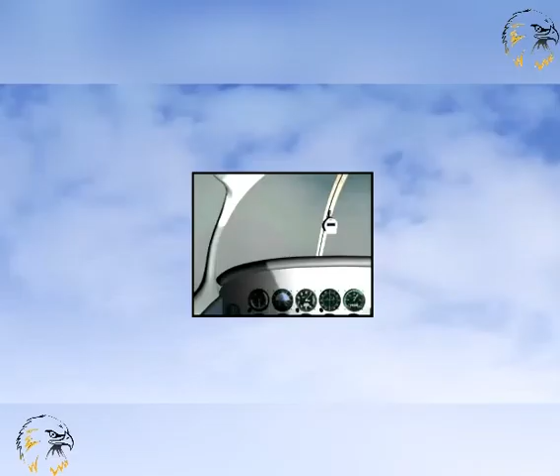In this lesson, you will learn about the instrument flight rules.

Expressed simply, the instrument flight rules, commonly referred to as IFR, are a set of rules for flights during which it cannot be assumed that pilots will be able to navigate their aircraft or maintain separation from obstacles, terrain, and other aircraft by reference to features outside the cockpit.

So, in general terms, instrument flight rules exist to ensure that a pilot has adequate clearance from ground obstacles and that his aircraft is safely separated from other aircraft in the vertical plane.

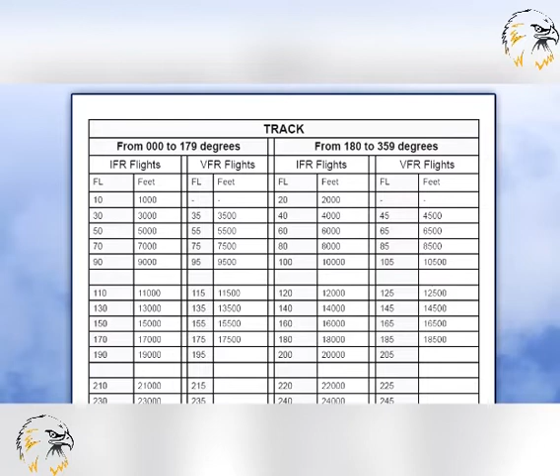For flight in accordance with the instrument flight rules, navigation and obstacle clearance must be able to be maintained by sole reference to the aircraft's instruments. Under the instrument flight rules, separation of aircraft from other air traffic is provided either by pilots receiving an air traffic control service or by aircraft flying at specified flight levels depending on their magnetic track over the ground.

You should note that whereas all flights which take place in instrument meteorological conditions must be conducted in accordance with the instrument flight rules, flight under the instrument flight rules may also take place in visual meteorological conditions.

Instrument flight rules are, as their name makes clear, a set of rules governing the conduct of an aircraft in flight. The instrument flight rules are quite independent of the prevailing meteorological conditions.

So even though the instrument flight rules assume that separation from terrain and other aircraft cannot be maintained by reference to features outside the cockpit, and that the aircraft is being operated by sole reference to its instruments, the instrument flight rules may still be followed or imposed even in visual meteorological conditions.

In fact, most commercial air transport flights within Europe and the United States are under continuous air traffic control, and therefore operate within controlled airspace under instrument flight rules for the whole flight, irrespective of whether visual meteorological conditions or instrument meteorological conditions prevail.

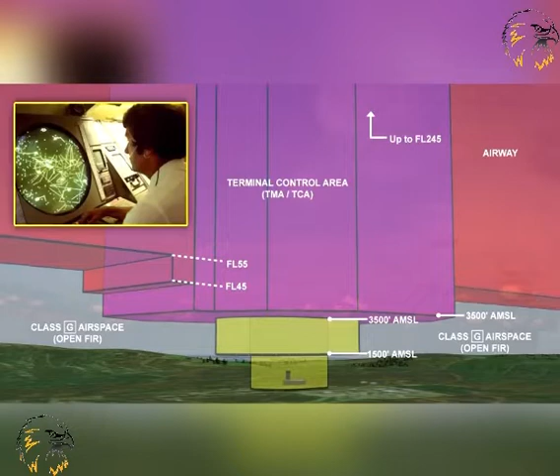Now that you have learnt about the concept of instrument flight rules, let's pass on to the rules themselves. Here they are, as contained in Chapter 5 of Annex 2 to the Convention on International Civil Aviation.

Scroll through the instrument flight rules and note that they take up scarcely more than one page. When referring to Annex 2 for operational or examination purposes, always ensure that you consult the very latest version of the Annex.

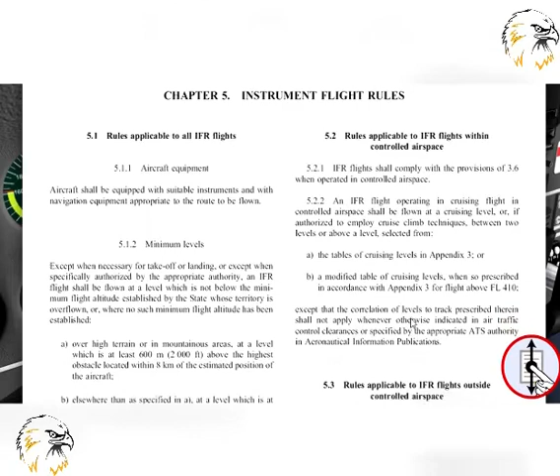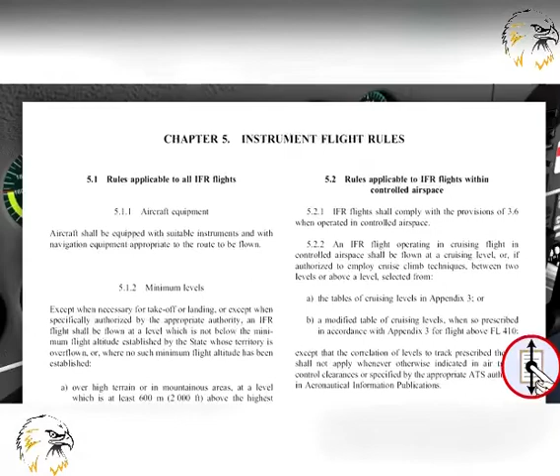In order to be able to fly in accordance with the instrument flight rules, aircraft must be equipped with suitable instruments and with navigation equipment appropriate to the route to be flown.

Flight in accordance with the instrument flight rules must not be conducted at a level which is below the minimum flight altitude for IFR flight established by the nation whose territory is being overflown. Where a nation has not established a minimum IFR flight altitude, the ICAO minimum level rules apply.

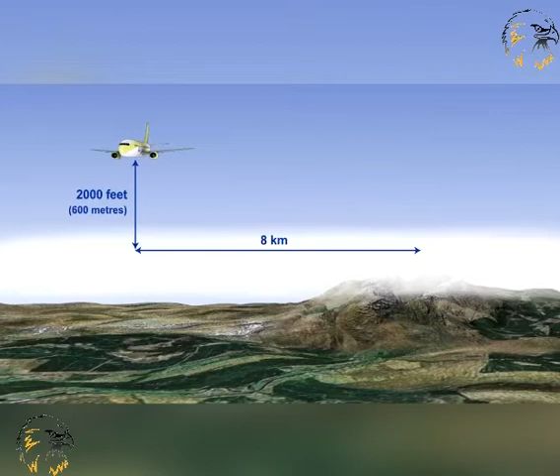These are that an aircraft flying in accordance with the instrument flight rules over mountainous areas or high terrain is to remain at least 2,000 feet or 600 meters above the highest obstacle located within 8 kilometers of the estimated position of the aircraft. Elsewhere than over high terrain or mountainous areas, IFR flights are to remain at least 1,000 feet or 300 meters above the highest obstacle located within 8 kilometers of the estimated position of the aircraft.

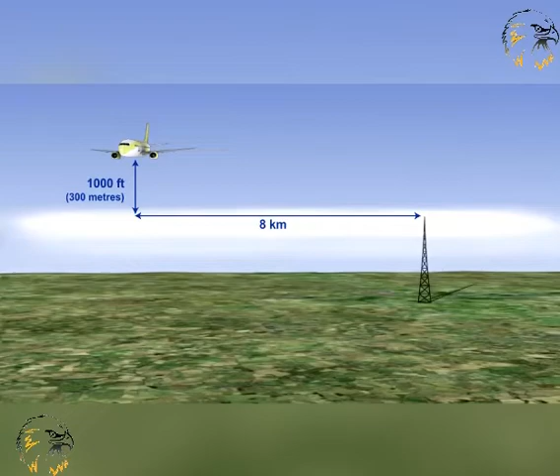For the purpose of adhering to the IFR minimum level rules, the estimated position of the aircraft must take account of the navigational accuracy which can be achieved on the relevant route segment, having regard to the navigational facilities available in the aircraft and on the ground.

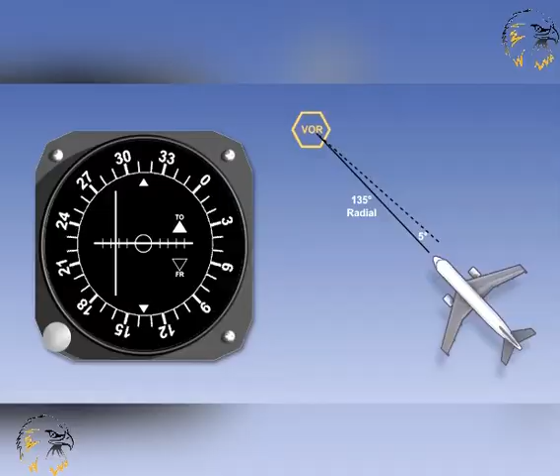Pilots should note that IFR minimum level rules do not absolve them from the necessity to adhere at all times to the overall minimum height rule, which stipulates that an aircraft must not be flown over congested areas or over an open-air assembly of persons below a height that, in the event of an emergency arising, would enable the aircraft to make a landing without undue hazard to persons or property on the surface.

The only exceptions to all the minimum level rules just mentioned are when an aircraft is taking off or landing, or when specifically authorized to descend below the established minimum levels by the appropriate authority.

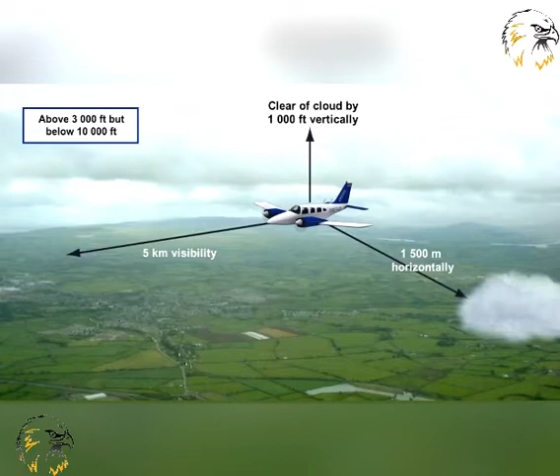In the lesson on visual flight rules, you learnt about the rules governing the procedure for changing from VFR flight to IFR flight. Similar rules exist to cover the situation where a pilot wishes to, or is obliged to, change from the instrument flight rules to the visual flight rules.

If he has submitted a flight plan, a pilot who elects to change the conduct of his flight from compliance with the instrument flight rules to compliance with the visual flight rules must tell the appropriate air traffic services unit that the IFR flight plan is cancelled and communicate to that unit the changes to be made to the existing flight plan.

When the pilot of an aircraft operating under the instrument flight rules wishes to cancel his IFR flight plan because he has encountered visual meteorological conditions, he must not cancel the IFR flight plan unless he anticipates and intends that the flight will be continued for a reasonable period of time in uninterrupted visual meteorological conditions.

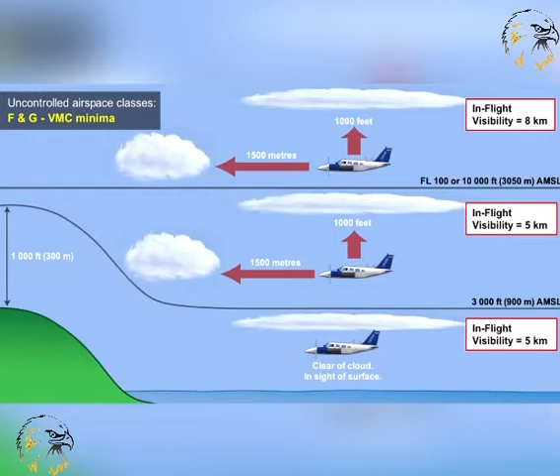When operating in accordance with the instrument flight rules in controlled airspace, the IFR flight is known as a controlled flight, and an air traffic control clearance is required for the flight to take place. The required clearance is requested by the pilot by submitting a flight plan to the appropriate air traffic services unit. When operating in controlled airspace, IFR flights must comply with air traffic control instructions and with all the sections of Rule of the Air 3.6.

Rule of the Air 3.6 deals with controlled flights, air traffic services, air traffic control clearances, adherence to flight plans, and communications. Rule of the Air 3.6 is covered by separate lessons in this CBT course.

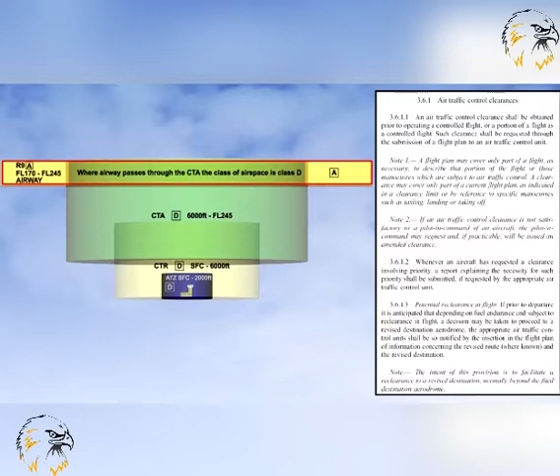Unless otherwise instructed by air traffic control or approved in an ATC clearance, when an aircraft operating in accordance with the instrument flight rules is in cruising flight within controlled airspace, the aircraft is to be flown at a cruising flight level dependent on the aircraft's magnetic track over the ground.

An indication of the correlation between cruising flight levels and magnetic track for IFR flight is shown on screen here. Note that different cruising flight levels are allocated for IFR and VFR flights.

The rule governing the correlation between cruising levels and magnetic track is semicircular in nature, because approximately half of the allocated flight levels are for aircraft in the cruise on magnetic tracks from 0 degrees to 179 degrees, while the remaining allocated flight levels are for aircraft in the cruise on magnetic tracks from 180 degrees to 359 degrees.

The semicircular nature of this rule is illustrated here. You can see that from 0 to 179 degrees, IFR cruising levels are at odd-numbered flight levels, while from 180 to 359 degrees, the IFR cruising levels are even-numbered flight levels.

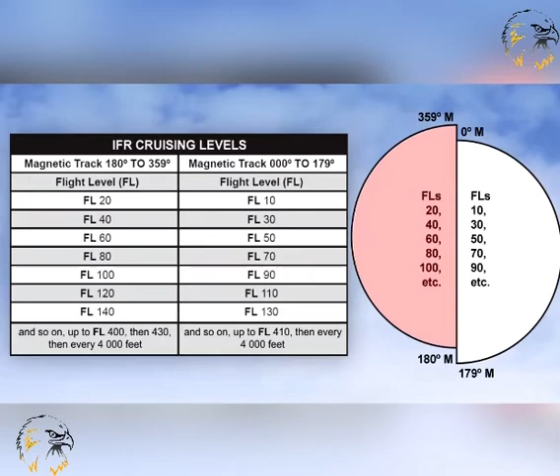If an aircraft is authorized to employ cruise climb techniques between flight levels, the higher flight level at which the aircraft levels off must also be in compliance with this so-called semicircular rule.

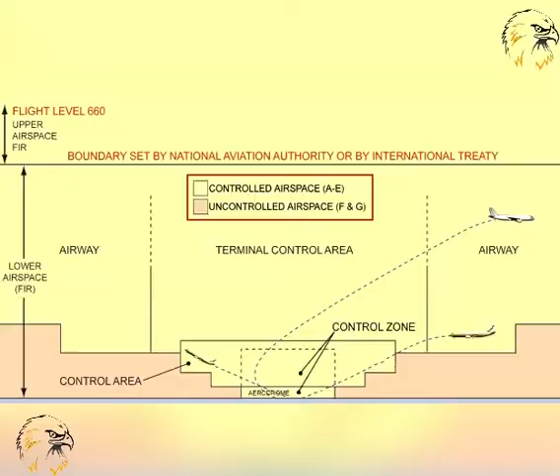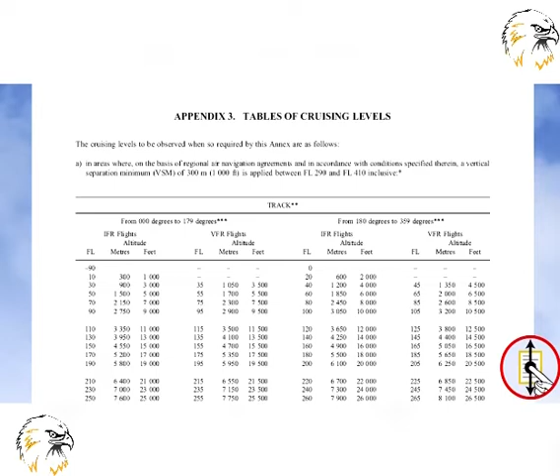The cruising levels that we have just illustrated are to give you merely an idea of the full table of cruising levels. That table is contained at Appendix 3 to Annex 2 of the ICAO Convention on International Civil Aviation. Be sure to refer to Annex 2 in order to study the details of this rule.

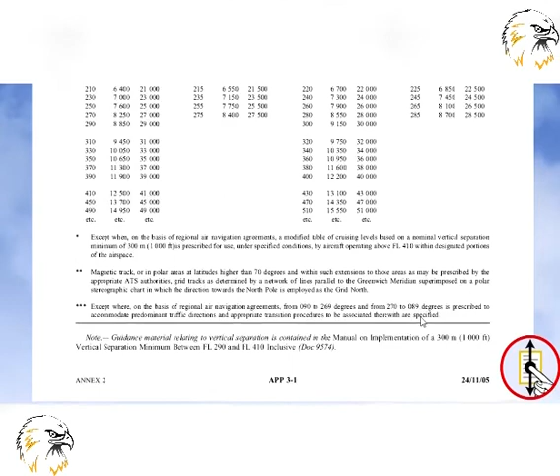We show an extract from Appendix 3 to ICAO Annex 2 here. Be sure, though, to refer to the latest edition of Annex 2 when using the table for operational or examination purposes.

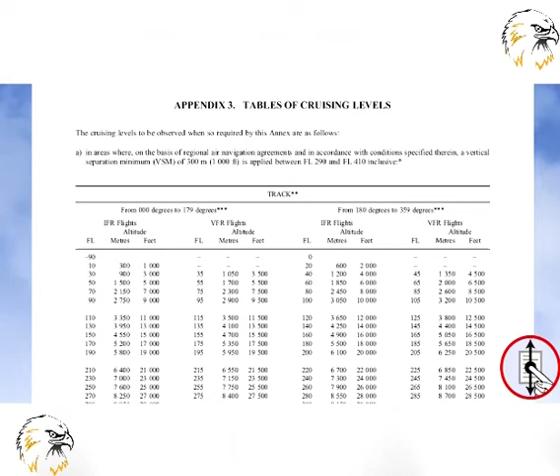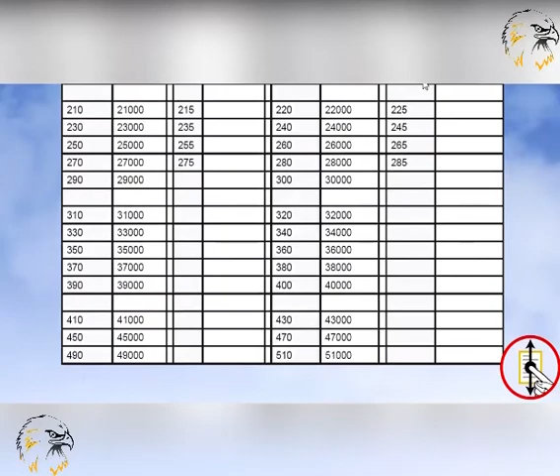The cruising flight level rule that you have just learnt about also applies to IFR flights operating in uncontrolled airspace, except when otherwise specified by the appropriate Air Traffic Services Authority for flight at or below 3,000 feet above mean sea level.

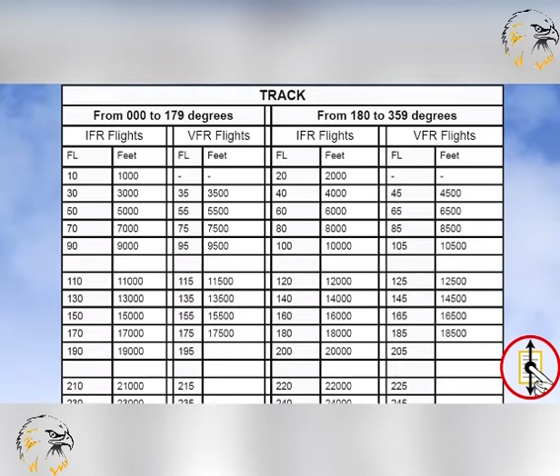An aircraft operating in accordance with the instrument flight rules outside controlled airspace is not always obliged to maintain an air-ground voice communication watch with an air traffic services unit.

The pilot of an IFR flight operating outside controlled airspace, but who is required by the appropriate Air Traffic Services Authority to submit a flight plan and to maintain an air-ground voice communication watch with an Air Traffic Services Unit, for instance, an IFR flight within advisory airspace, is required to report his position as specified in Rule of the Air 3.6.3, applicable to controlled flights.

That completes the lesson.